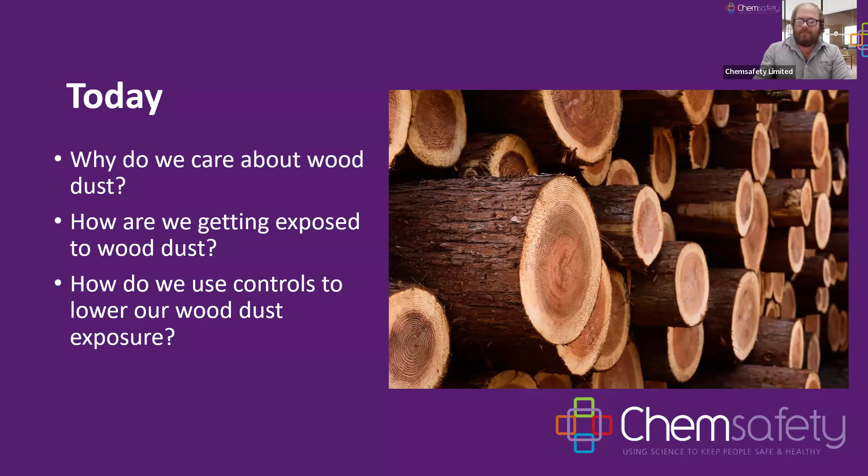So to start off with, I've got some interactive parts here to get an understanding of where you guys are, how you're exposed to wood dust, etc. So there should be a QR code that you guys can see on the screen here to menti.com. And I believe when you enter that code in as well, you'll be able to answer some questions and we'll be able to see some of the answers here shortly. So I'll just give you some time there to answer these questions and we'll see what the word cloud spits up about what industries you guys work in and how you might be exposed to wood dust.

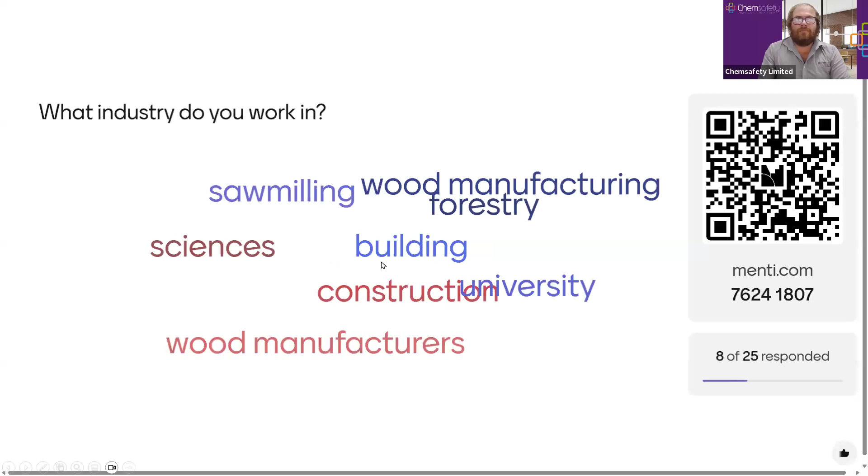Awesome, I can see some answers coming through here. So I'll just give it a moment. So as we're getting quite a range at the moment, as ones become more common or frequent, they'll get bolder in this word cloud. So we'll just give it a little bit more time. And thank you for participating. It makes it a lot easier on my part.

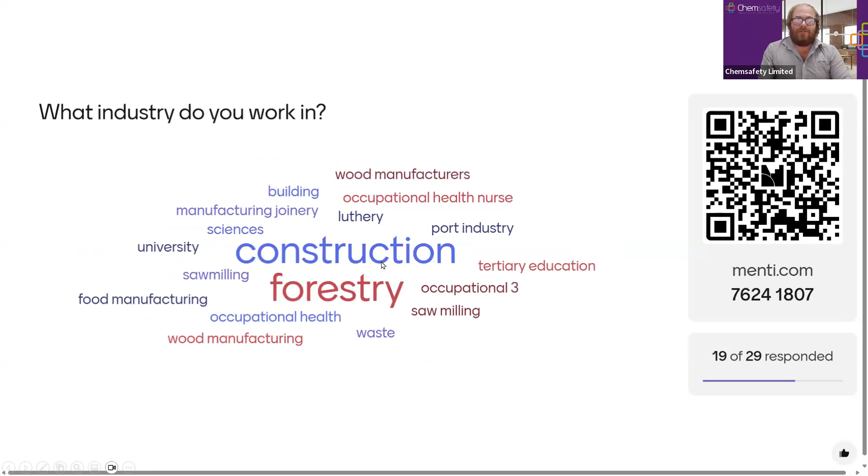So you can see here, construction and forestry starting to come to the fore. As you could expect, forestry is where we get our wood from in the first place. Construction, we often use wooden materials. Food manufacturing, occupational health, so health nurses, hygienists, etc. What else do we have here? Tertiary education, sawmilling, that makes a lot of sense. Universities, buildings, wood manufacturer, joinery, yeah, all really common areas where we can see wood dust.

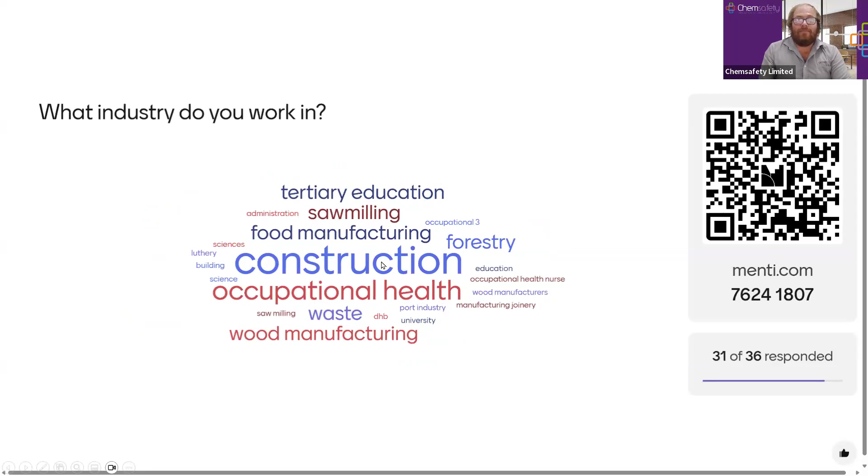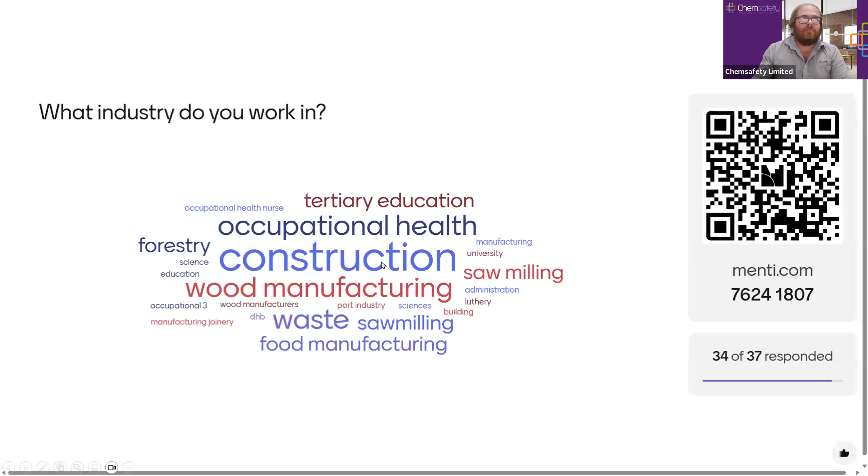That is fantastic. So I'll try and tailor examples where appropriate to some of these sectors. Port industry, yeah, a lot of wood gets exported, whether it's the bulk logs or the finished materials, and you can see them piled up at ports around the country. Awesome. Thanks for that. And by all means, keep filling out those questions there. We'll move on to the next one. Hopefully you have answers to that too.

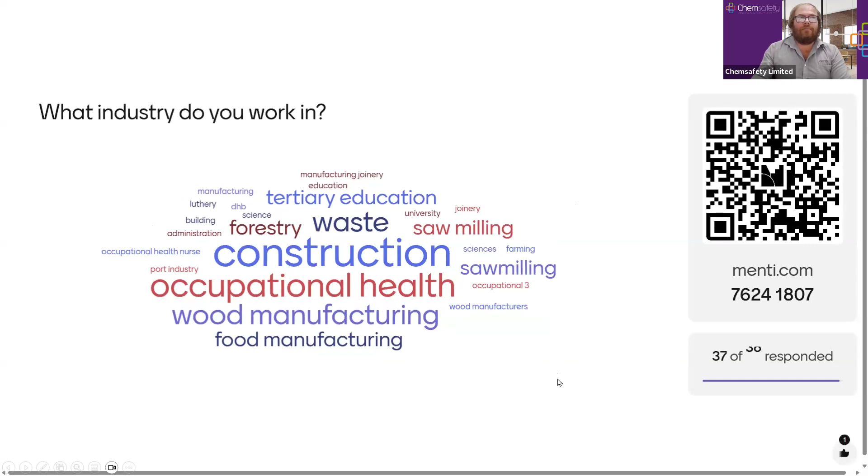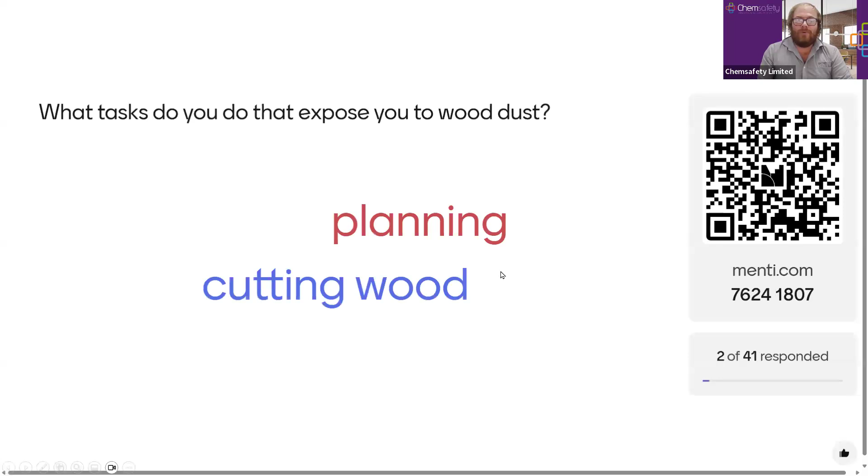So this one here is, what tasks do you do that expose you to wood dust? So we know what industry you're in. Are you drilling, cutting, routing, sanding, etc.? So if you could start answering that question as well, it might be a separate QR code. That's coming in here. Awesome. Give it a couple more moments. Cutting, really obvious one there. It's how we predominantly get exposed to wood, is by cutting it.

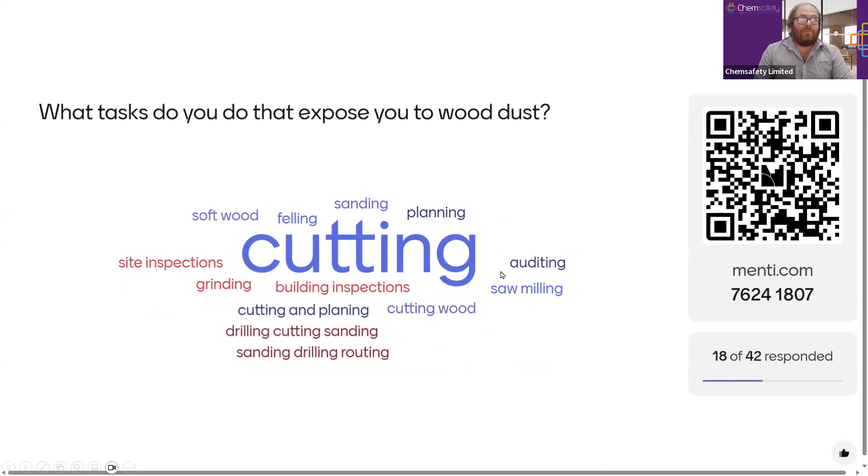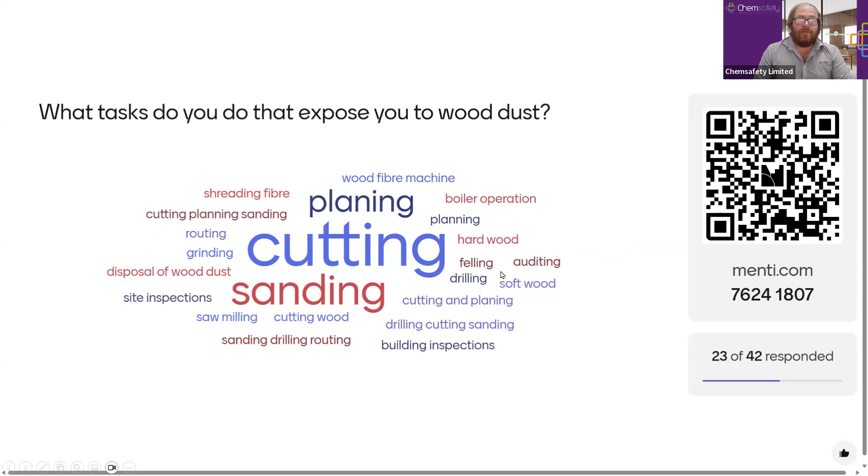Sanding, planing, building inspections, grinding wood, boiler operation, yep, biomass boilers, wood pellets, sawdust, offcuts, all those can be used. Shredding fibre, drilling as well, cutting, felling trees, yep, makes a lot of sense there. Planing, sanding, yeah, just what I anticipated, but it's good to see it's coming through here in the data. A couple more moments for the last few people to respond.

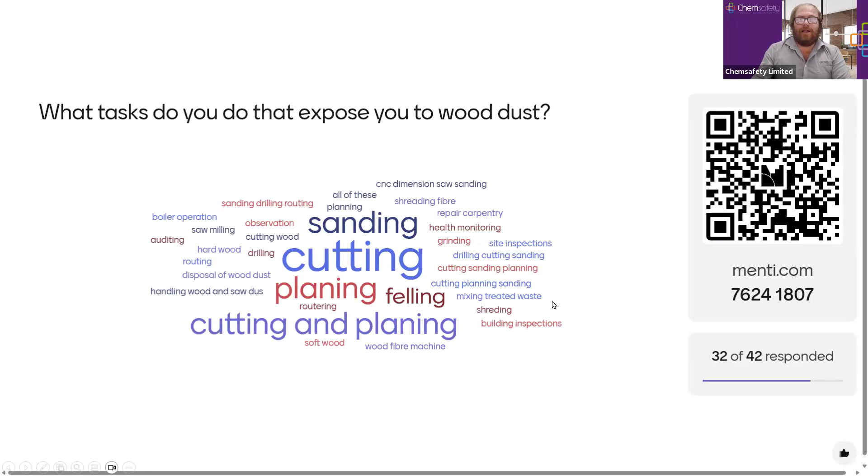So CNC, dimension saws, sanding, yep, CNC machines. Great that you can sort of leave them to be, but they do create a lot of dust. Observations. Awesome, thank you guys. All right, let's see what we've got on our next slide. And this one is asking, what controls do you have? So what measures are you taking currently to reduce your wood dust exposure? Extraction, fantastic. P2 masks, PPE, respirators, yep.

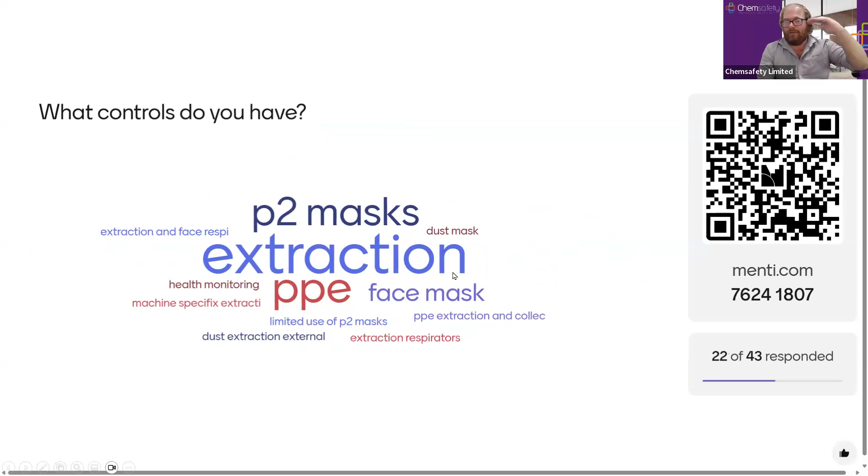So I'm seeing a lot of PPE and extraction here. So we've got medium, not the highest order control of elimination, but we've got extraction, which is still pretty high up there, and we've got PPE, one of the lower order controls, but absolutely is needed in a lot of cases. Machine specific extraction, isolation, health monitoring, that's fantastic. Cleaning, misting, for dust suppression, that's awesome.

Workshop vac. Yeah, lots of great answers there. So I'm good to see that there's a range of controls already being done. So that is fantastic. Thank you for filling those out, guys. Helps me with the presentation.

So, why do we care about wood dust? Why am I doing this webinar in the first place? So, the main reason I chose to do wood dust as a topic for this webinar is from January to March 2026, WorkSafe inspectors are going across the country doing proactive assessments that focus on the wood product manufacturing subsector. These visits aim to help businesses understand their health and safety responsibilities and manage critical risks such as machinery safety, work exposure to toxic dusts, fumes, chemicals, and hazardous substances. So that worker exposure to toxic dust and fumes, chemicals, that's where I come in as an occupational hygienist.

So what is a common building product used in New Zealand and is a vital part of our economy that employs thousands of people in many sectors? So I've just noted here that we've got 1.82 million hectares of planted production forests. So, those are just the forests that we're going to be felling and using to make timber, other products out there, mostly pine. And we've got over 5,000 people employed in the forestry sector and a further 17,000 people that work in wood product manufacturing at the last census, let alone all the builders, construction workers, people that work in waste products and landscaping, etc., that are still going to be exposed to wood dust.

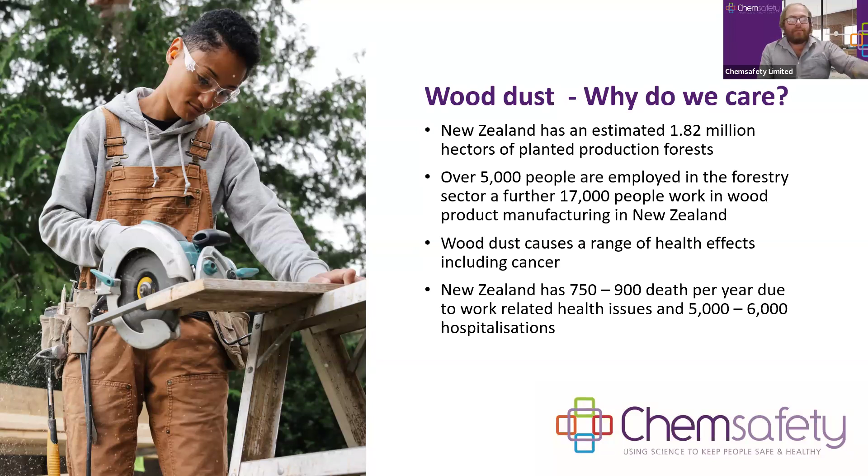So when we're assessing wood dust, we often compare it to exposure standards, our workplace exposure standards. And for wood dust, we split that into two categories, softwood and hardwood. Now, they're not quite as simple as you're seeing. These softwood and hardwood distinctions are based on its cellular structure. It's a botanical distinction, and it isn't directly based on the wood's hardness, although it mostly follows. There are some pretty unusual examples where a balsa wood, for example, is a hardwood, despite it being a very soft and light wood. And it's not specifically based on its density.

Softwoods are gymnosperms, which means they have naked seeds, typically cones, as you can see in this picture here, and tend to have needle-like leaves as well. So common species of softwood that you'll come across in New Zealand are pine. Most of our wood dust is going to be pine dust, Douglas fir, macrocarpa, larch, rimu, totara, kauri. And our workplace exposure standard, which I'll talk to in a little bit more detail later, is 2 milligrams per meter cubed. So that's the limit we can have for 8 hours a day, 5 days a week, working year, working career, and most people should be totally safe.

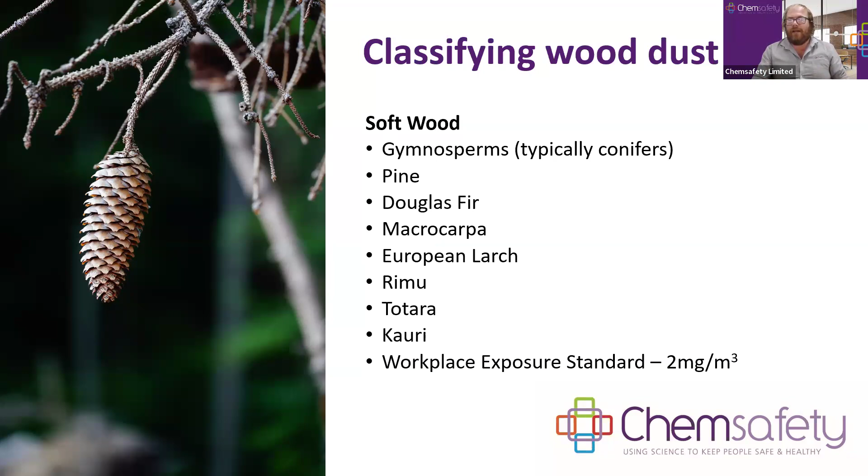On the opposite end of the spectrum, so we've got our softwoods, we also have our hardwoods. Now, hardwoods are angiosperms, which means they have enclosed seeds, typically in the form of fruit or nuts. So kind of like an oak tree with its acorn nut. And they tend to have broad leaves and are deciduous. So hardwoods typically grow slower and have stronger, denser woods than softwoods, although it's not a hard and fast rule.

Hardwood dust is a sensitizer. That means that once a person is sensitized, and they can take a long time to become sensitized, a very small exposure can cause quite large health effects. And hardwood dust is also a carcinogen and is linked to sinonasal cancer, whereas the evidence for softwood dust and carcinogenicity is a little more up in debate.

So some hardwood species you're likely to come across: eucalyptus or blue gum, silver beech, red beech, tawa, and rata. And the workplace exposure standard for hardwood is 0.5 milligrams per cubic meter. So when we compare that back to the previous slide with softwood with 2 milligrams per cubic meter, we can see that the hardwood dust is a lot lower, a lot more stringent to meet there.

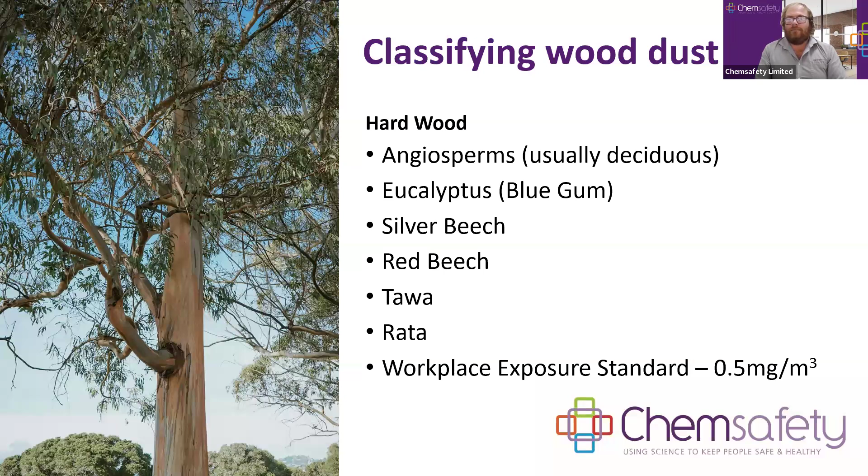So I talked about these. We'll just go a bit more detail to make sure we understand them. Workplace exposure standards are guidance values, or we sometimes shorten them as WES, that are set by WorkSafe New Zealand. These are concentrations in ppm, parts per million, parts per billion, ppb, or milligrams per meter cubed. And these should mean that most workers can be repeatedly exposed to this concentration without coming to harm.

Now, these are designed as guidelines for health risk monitoring by trained people. They are not a legislative requirement that you must be under, but it's showing good practice if you can be under these levels. And we have three main types of exposure standards. We have a time-weighted average, a short-term exposure limit, and a ceiling limit.

When we are talking about wood dust, they only have time-weighted average exposures. Their health effects are based off a chronic, long-term condition. That's why we want to protect with an average exposure limit, as opposed to an acute effect that we might try to protect from with a STEL or ceiling limit.

So, how are we getting exposed to wood dust? Now, you guys gave some great examples earlier, the tasks you're doing, the industries you're in, and how you've been exposed. And yeah, my tip here is quite similar to what you guys provided there. So great that we've got this on the map. Forestry makes sense. We're cutting down the trees. Sawmills, where we're processing the logs into timber. Joinery, so we're making our kitchens, we're making our wooden structures from that. Furniture manufacture, we're making our beds, our tables, our chairs, etc.

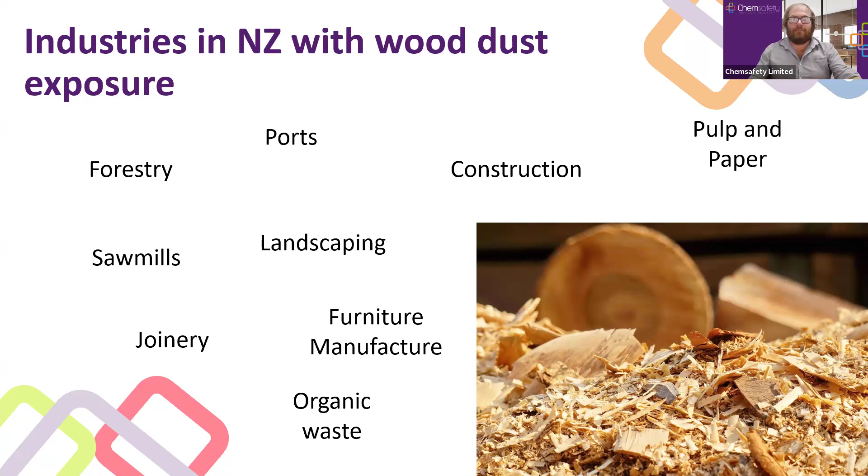Compressed air cleaning. Been to a lot of factories, wood product factories, where at the end of the day, the workers are coated in wood dust. What they do is they go find a compressed air bit and they blow themselves clean. That is an awful thing in terms of exposure.

Not only have we got the safety issues of potential compressed air injuries, but we're just disturbing all that dust and letting it get up in the air again and giving it time to spread out and being exposed to it again, whereas it's relatively settled when it's on our clothes.

We also might have situations where they've got some great on-tool extraction, but that extraction ends up in a bag, and that bag needs to be emptied and replaced. So despite capturing it there, they then take it outside and tip it into the skip, creating a lot of exposure in that task. And it might not all be workplace exposure. There are a lot of hobby wood turners out there in their sheds, so you can be getting exposures at home as well.

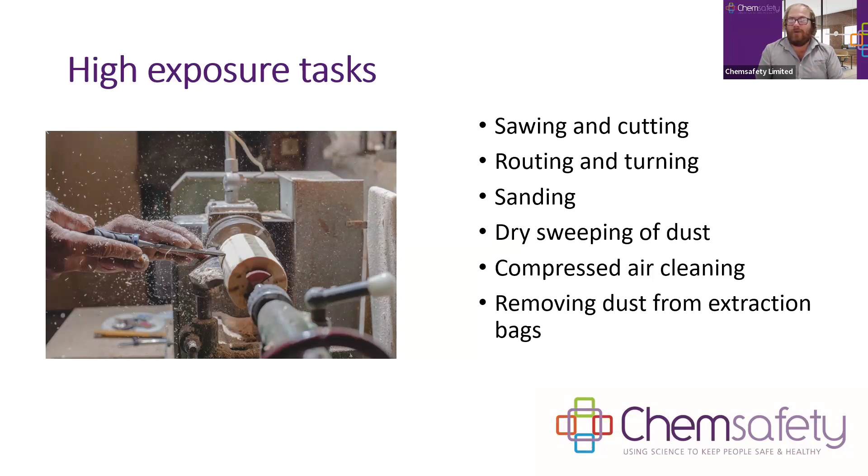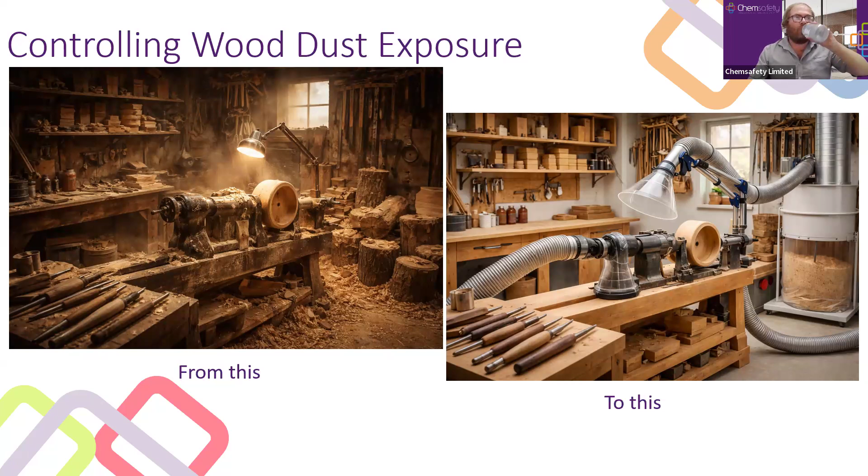Now, often these lower order controls are quicker and easier to implement. So they get done first, while the company then works out the capital requirements to build a ventilation system or to investigate a new product that will substitute or eliminate the hazard.

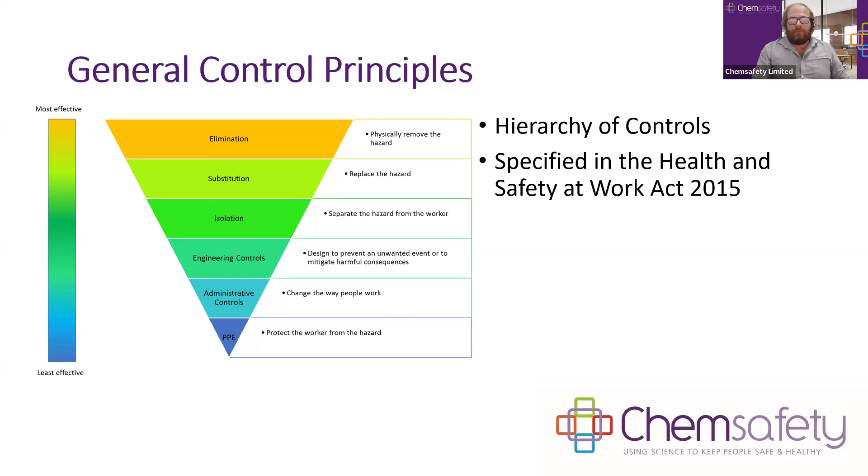We also have the source path receiver model. So the controls are going to be the most effective when they're used at the source of the exposure. Then the next tier down is at the path of exposure. And finally, they'll be the least effective when we're controlling at the person because the hazard has already got into the person. If that control fails, the exposure's there.

Whereas in the other two, if it fails, we've still got other points where we can try and capture the exposure. But controlling at the person is a lot easier, to get them to wear PPE. Controlling at the source can be a lot more difficult and a lot more expensive.

Now, it can be difficult when the worker is really close to the source to be able to control the path, but that is definitely something we can do for adjacent workers. We've got a lot more opportunities to control the exposure in the path. Because this is outdoors, increasing ventilation, etc., isn't really practical because we're at the mercy of Mother Nature there. Whereas we could create a water misting system here to capture the dust that is missed at the source and is traveling across to that worker on the right.

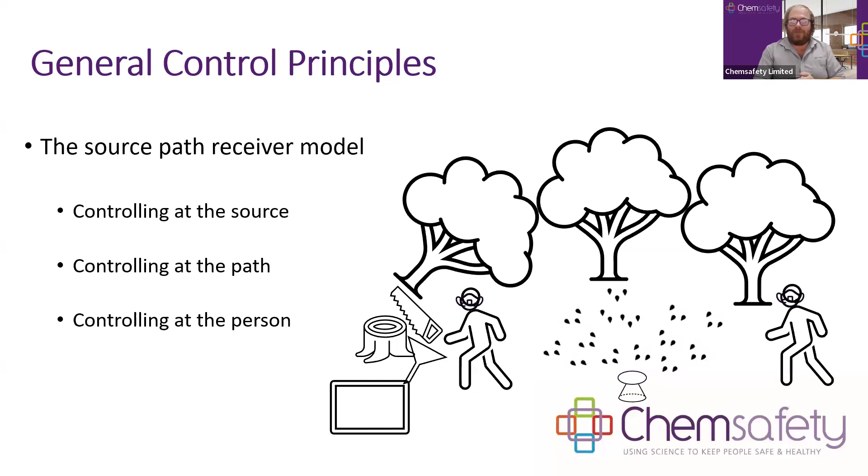So then we have the Swiss cheese model, which you may have heard of before as well. So no control measure apart from elimination is perfect. If you think of each control measure as a piece of Swiss cheese, each control measure has its flaws or weak points, but if you have enough layers of controls, then you minimize the likelihood of all the weak points aligning and leading to exposure to your worker in this case.

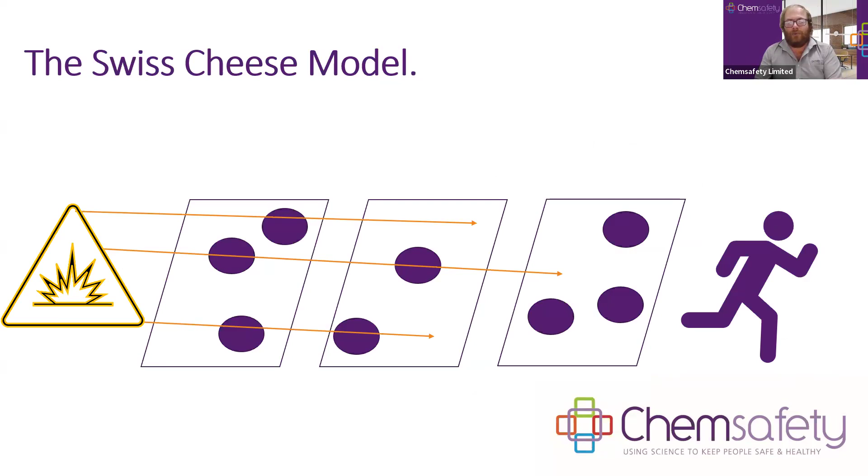So I've added some examples here. We've got our worker on one side and we've got our exposure on the other. We have some engineering controls in place, but you can see these three purple dots here are where those particular ones weren't serviced in time. So they weren't working effectively and the exposure got through.

Then we can see here we've got some administrative controls, such as training on how to make sure the machines are operational, that they've been serviced, and training on the hazards of the wood dust, as well as how to use your PPE effectively. Now, some people weren't there on the training day, so you can see that exposure got through, but we still see the person was wearing PPE correctly, so they're no longer exposed. That final layer of Swiss cheese was able to stop that exposure from happening. So we want a multi-layered approach with our controls.

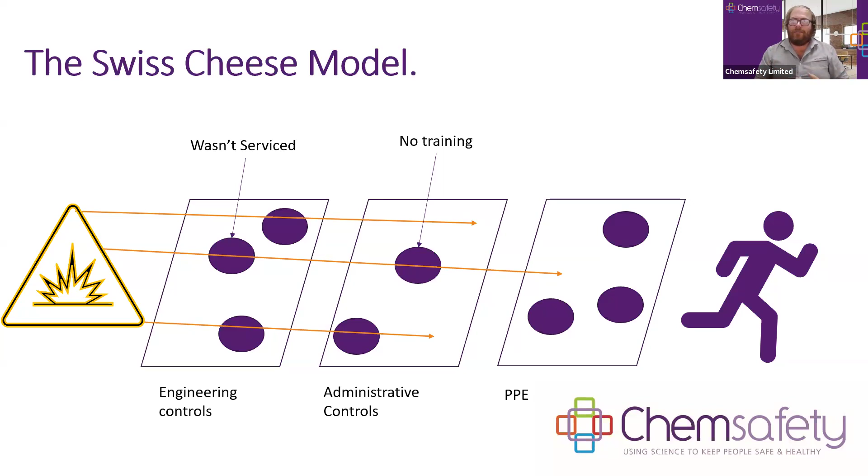So going down the hazard hierarchy with some specifics about wood dust exposure and its controls. We've got elimination and substitution. Now, elimination is not normally practical. If your job is to cut down the trees in the forestry block, well, the trees have to be cut down. Or if you're making wooden furniture, you have to make wooden furniture as a business. It's hard to not do that and still be an effective business.

But in some cases, it can be done. If wood is only a small part of your product that you're manufacturing and you only need one particular size of wood, you could get those panels bought and pre-cut to the right size and dimensions for you. So that leads to no more cutting and exposure on site. Niche case, but can be done.

Substitution can be done in some circumstances. So if we're working off hardwoods, but there were suitable softwoods that have less severe health effects that we could use, we could substitute from a blue gum piece of timber to a piece of pine and reduce our exposure there. We could also change the form of the wood.

So if we're using a biomass boiler and we had just pure sawdust used as our product, but instead we could use this pelletized form, like you can see in some of those low emission burners, then we've changed the form. That pelletized form is a lot less dusty than pure sawdust. So we've substituted to a less hazardous form of the product as opposed to changing our product overall. It's the exact same wood, just in a less dusty version of it.

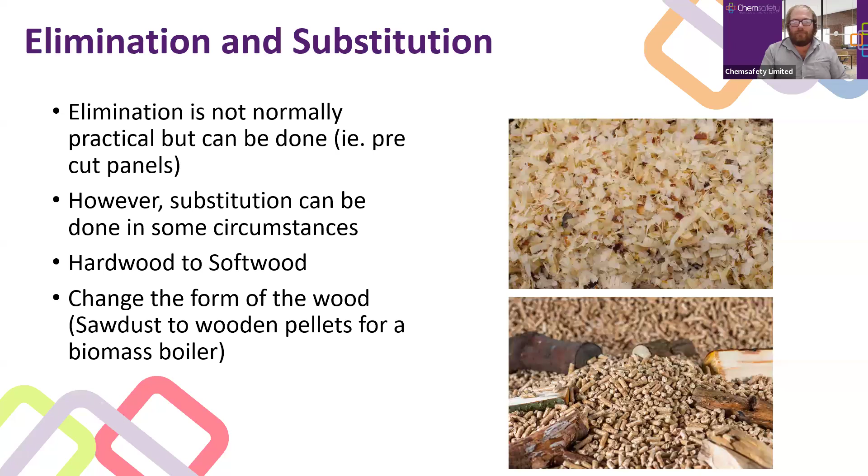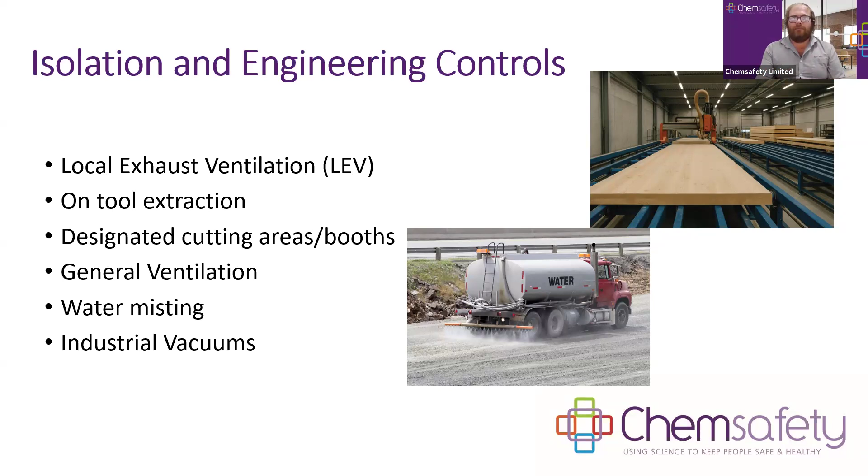Administration controls. These are controls that aim to change the behavior of the workers in order to reduce their exposure. So doing something carefully, cleaning up as they go, as opposed to just rough cutting, not caring about the dust and leaving it everywhere. So good housekeeping will tend to lead to lower exposures.

So we could have cleaning policies, training requirements, training the staff on how to use their controls, how to use the LEV, how to change the filters, how to make sure it's working properly, how to use their PPE. We can do exposure monitoring to check that our controls are valid, including health monitoring as well.

So you can have your workers do lung function tests to make sure that they're not being exposed, and if there is some exposure or some decrease in their lung function, that they're being tested and treated for that quickly, as opposed to it just going on in the background.

Exposure monitoring can be done pre and post implementing controls. All right, our exposure was at 20 milligrams per meter cubed, but we put in local exhaust ventilation. We got rid of compressed air cleaning. We use industrial vacuum cleaners. We wear RPE, and we've dropped our exposure down to 2 milligrams per meter cubed. That's fantastic. Pardon me.

These are the things where exposure monitoring can be really useful, and in a situation where your controls have been in place for a while, that they're still as effective as they were when they were first introduced. As equipment ages, it may get less effective. So this is a way to validate that it is still protecting your workers.

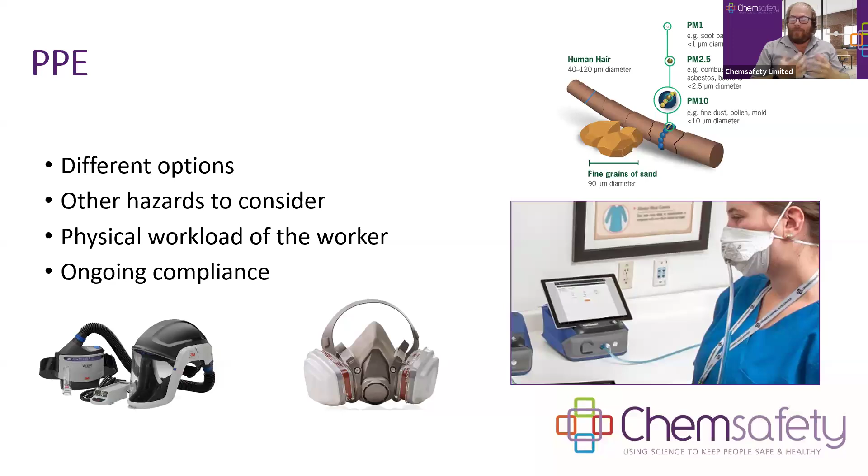So, some key takeaway messages, and we'll have some time for some questions. Wood dust exposure is common in New Zealand workplaces. I've seen a lot of workplaces that have quite high wood dust levels, and a lot of them we've gotten down, but there's a lot more workplaces out there. And wood dust can cause a range of health effects that are quite nasty: asthma, respiratory irritation, skin and eye irritation, cancers. These are things we don't want to have, and we can avoid this as well.

And there are controls available that we can use to reduce our exposure. If we can change from hardwoods to softwoods, if we can isolate, if we can automate, so we're actually getting people away. An administrative control I didn't talk about earlier was job rotation. So if you have a task that's going to lead to exposure, we could have the staff rotate through that job, so no staff member is exposed the whole time.

But we're going to need a combination of these controls to protect workers in most instances. And whatever controls you use, it's important to train your workers in how to use them, how to make sure they're still working effectively, and we need to monitor their effectiveness.